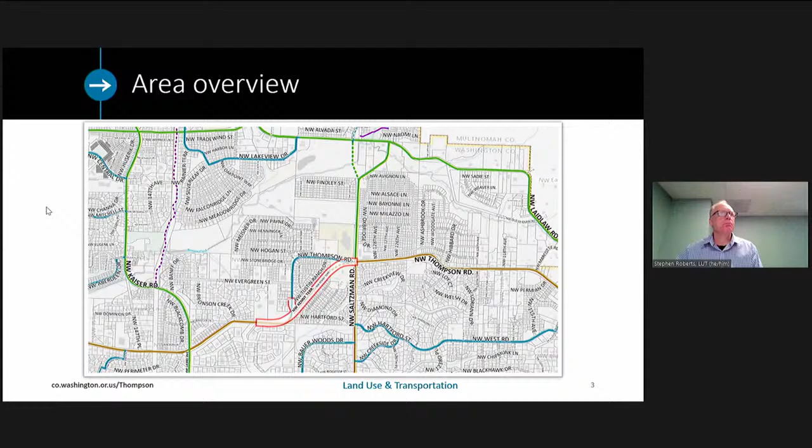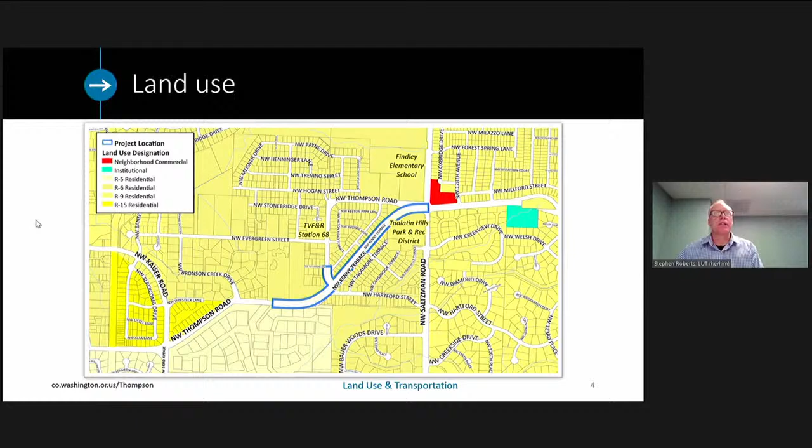Land use here is predominantly residential. There are a few specific uses in close proximity to this project site. We have Findley Elementary School, a large vacant parcel currently owned by Tualatin Hills Park and Rec District that'll be a future community park site, and a neighborhood retail and commercial center at the northeast corner of the intersection of Thompson Road and Saltzman. So we do have some pedestrian generators, or pedestrian attractions, in the area.

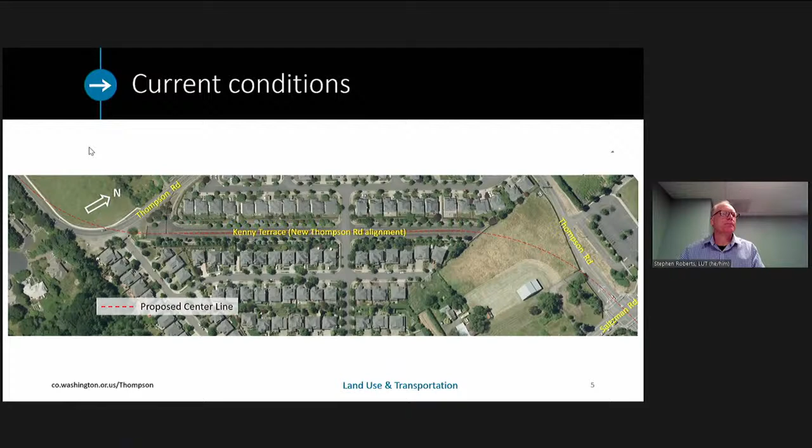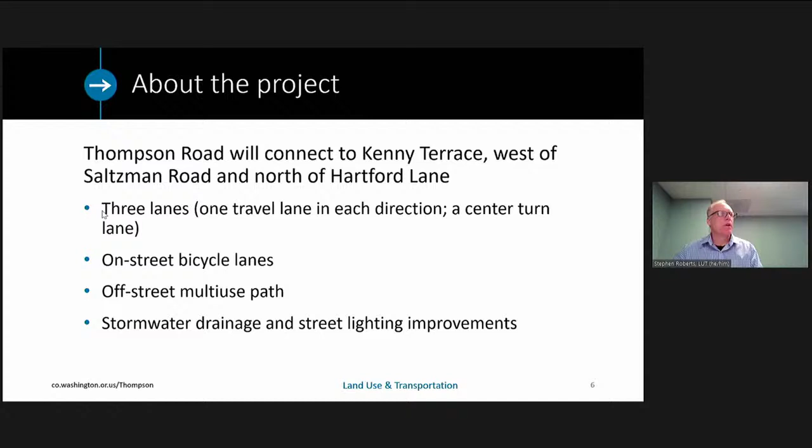The project will essentially look fairly similar to what you see there today in terms of the roadway. It will have 3 lanes: one travel lane in each direction for cars and a center turn lane. There are on-street bike lanes, and those will be modified to be what we call buffered bike lanes, so instead of a single stripe between the car lane and bike lane, there will be two stripes about 2 feet apart. That creates a little bit of visual and slightly larger physical separation between bikes and vehicles. There's an off-street multi-use path proposed as part of the project, and there would be additional stormwater drainage and lighting improvements as part of the project improvements through here.

I wanted to address, I'm sure many of you have watched or heard about a work session we held with our board back in February of this year. The purpose of that work session was for all county capital projects. The board has adopted a policy stating a preference to provide safer bicycle facilities on county capital projects. That might mean something called a cycle track or a multi-use path, but in most cases that typically would mean some sort of cycling option for people to ride outside the roadway, giving additional separation from vehicle traffic for people who are potentially less confident riders or have safety concerns—younger children, perhaps older adults—who may not be comfortable riding a bike on the roadway but would ride otherwise.

At the February 2nd work session, we took to the board a proposal for a multi-use path and compared that with existing conditions. A majority of our board members supported implementing the multi-use path option, for the reasons I stated: it provides a safer, more comfortable option for cyclists regardless of age or ability. Because we have pedestrian-attracting uses in the vicinity of the project, there could be increased pedestrian demand in the area over time, so we're supporting better access to those destinations for people walking and biking.

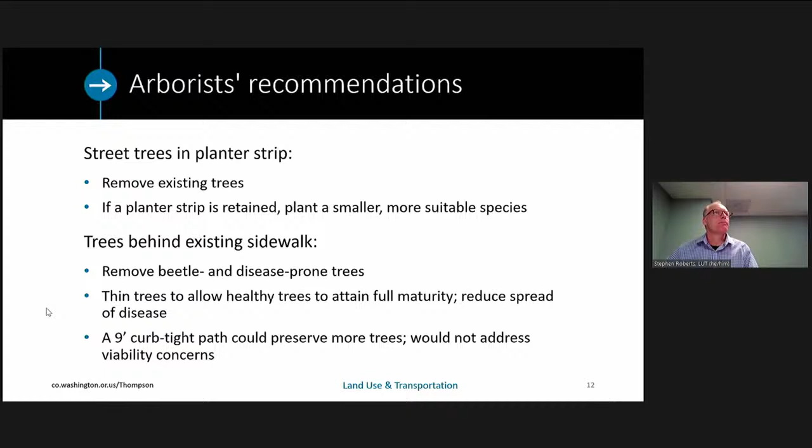So we're going to walk through some different designs. The first design we're calling the baseline design, and that's what the board expressed its preference for in the direction they indicated at the February work session. That is a 10-foot wide multi-use path.

The multi-use path means that it's a pathway off the street, designed for both bicyclists and walkers to use, pedestrians to use. With this design, there would be a 4-foot planter strip between the roadway and the sidewalk, matching what you would see on the ground today between the roadway and the existing sidewalk.

And then we looked at 2 different alternatives of a curb tight path - again, a pathway that would be off street, but would not have the planter strip and the trees helping to create more of a buffer between the path and the roadway.

So we have a few exhibits that I'll walk through that help illustrate what those different concepts would look like.

On the next several slides, the upper image reflects the existing conditions today. You'll see a 4-foot wide planter strip, that gap between the curb and the sidewalk, an existing 5-foot sidewalk, and then about 10 feet between the back of the sidewalk and the adjacent hedge and privacy fence, or in some places stone retaining walls. So there's about 10 feet of landscape area there.

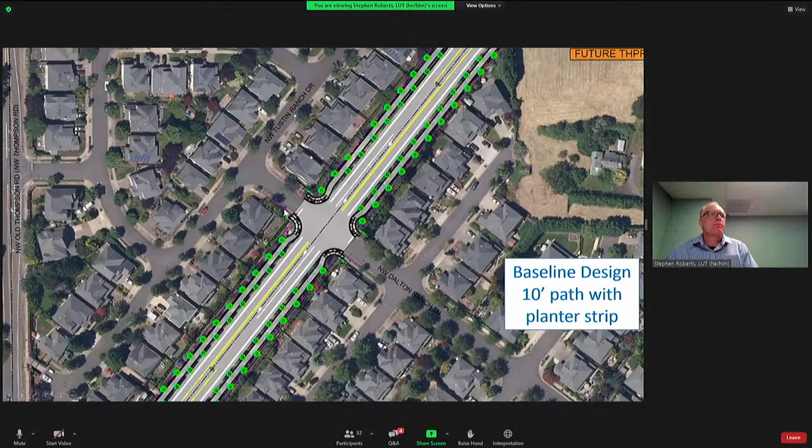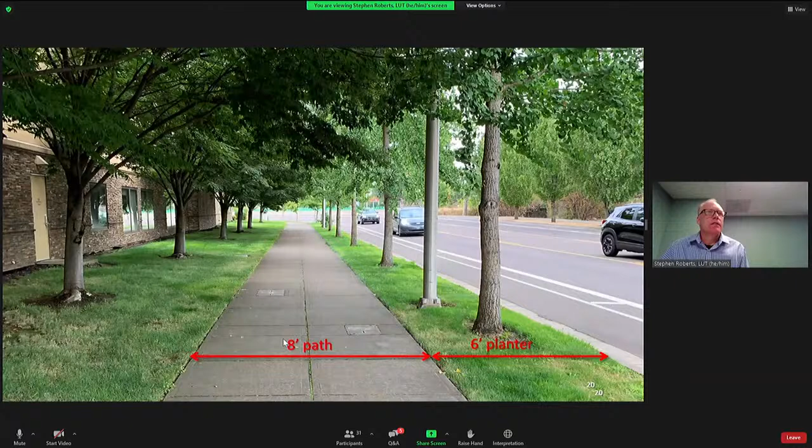This is a different configuration—an 8-foot wide path with a 6-foot wide planter. Again, not exactly what we're talking about here, but this slide helps illustrate the effect of trees planted on both sides of the path. If you look closely, the trees are staggered so that those behind the sidewalk fill the gaps between the trees near the street. Over time, as they mature, they create a nice uniform canopy that provides a lot of shade over the pathway. These trees were planted about 10 years ago, so this shows the effect after roughly that same period of time.

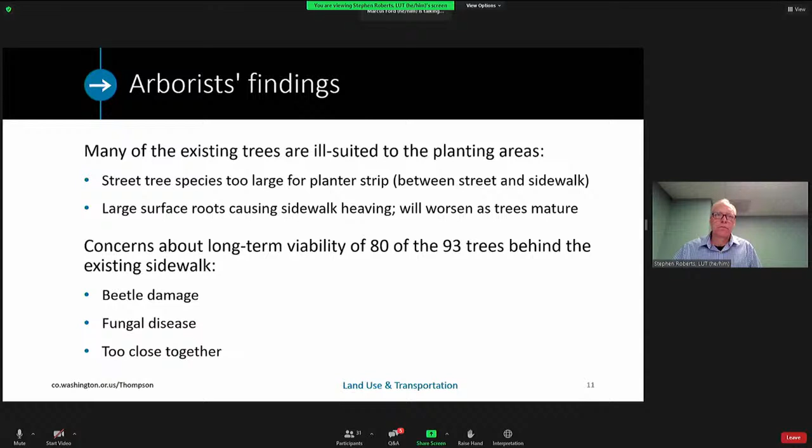Thank you. Another question, asked by Eric. This is a road alignment project. Why so much emphasis on sidewalk and trees when nearly 100% of the residents in the area oppose? What is the budget without the additional wider sidewalk? I believe it was 500,000 less. Interesting, that was not shown.

There are some other options too, things called cycle tracks that are sort of like this, but they're actually more adjacent to the roadway for a cyclist to ride on, though elevated up slightly above the roadway.

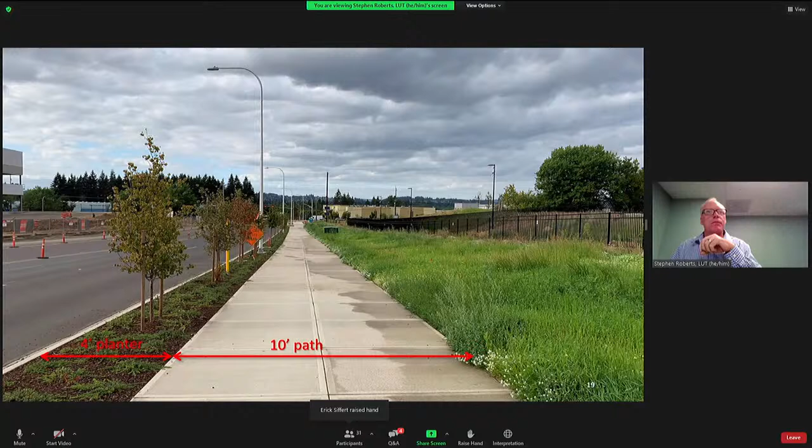Even though the crux of the project from a vehicular standpoint is really just connecting up either end of that existing roadway, we are also trying to think about how we create a more interconnected pedestrian and bicycle system that's more accessible, safe, and user-friendly for people of all ages and abilities. In this particular context, there are pedestrian destinations of the school, the neighborhood commercial center, and a future park there. So we think that with this road project, there's an opportunity to lay a foundation for what could be a more broad, interconnected network of these kinds of facilities.

But perhaps even if it weren't part of a future interconnected system, we could still anticipate there's going to be an increase in pedestrian traffic in this area as the park site develops.

I've walked this area on Kenny Terrace a few times myself just to get familiar with it, and observed quite a few people out walking at different times. I actually walked further west on Thompson Road on some new sidewalks the county built within the last few years that are 5 and 6 feet wide. I was walking with another person, and we kept having to step aside and walk single file because we kept getting passed by people walking the other direction or jogging. This was at 10 in the morning on a weekday. So there is a real, if you build it, they will come scenario that happens.

We find this all over the county: when we either build a sidewalk where there wasn't one previously, or when we upgrade our sidewalk facilities, they do just attract more usage.

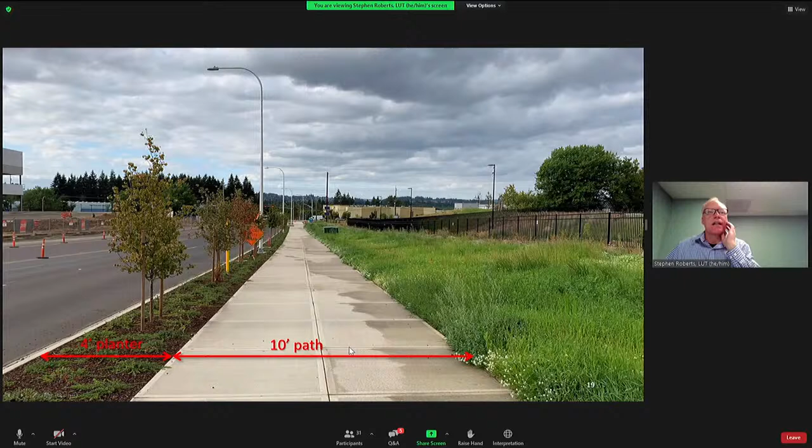Right, and as you were answering, Eric's hand came up, so I'm assuming it's in reference to what you were just talking about. So I'm going to go ahead and allow Eric to speak. Eric, you can unmute yourself and ask a follow-up.

Yes, thank you. Hi. While I'm a resident of the neighborhood, Tallamore Terrace, I'm not on the HOA board, but I've been involved in a lot of the meetings. Thank you all for doing the project. I think the ideas are pretty good.

We had a chance, not by choice, someone forwarded to us about the February meeting, and a lot of us listened to it. And since then, petitions have gone around, and nearly 100% of the people that actually live here do not want this to happen in terms of the sidewalk part of the project. I'm just interested to know if this was such an important thing that Chairman Harrington brought up 3/4 of the way through the February meeting on a 3-2 vote.

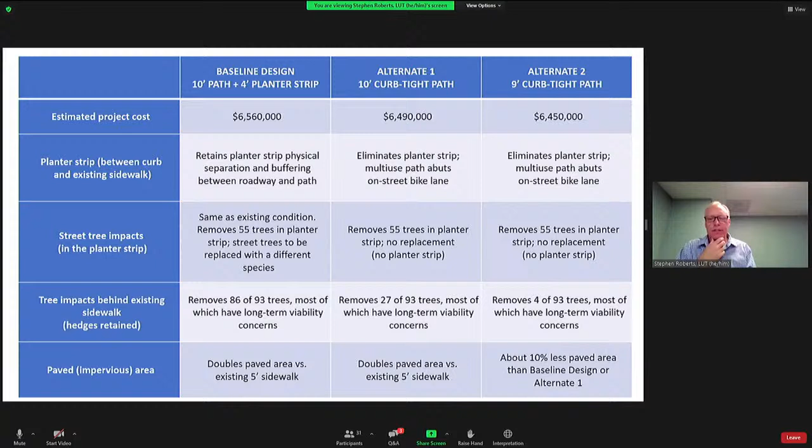I think your points are all well taken, and as we move forward, we certainly are going to continue engaging with the neighborhood and the homeowners association. One of our next steps with the project—maybe Rocky can help us out. I know we are talking about doing another open house for the project, and I'm drawing a blank right now on the timing of that.

Hey Stephen, so we're waiting to see what the results are from this meeting, and we're looking at possibly November for the second open house. All right, great, thank you Rocky.

All right, we have another question in the Q&A from Kayati Shah, and my apologies if I mispronounced that. Is the county considering providing a retaining wall to impacted houses like Bethany Boulevard houses have?

Oh, okay, I suspect that might have been a sound wall, probably. I think I will probably ask Joe, do you mind?

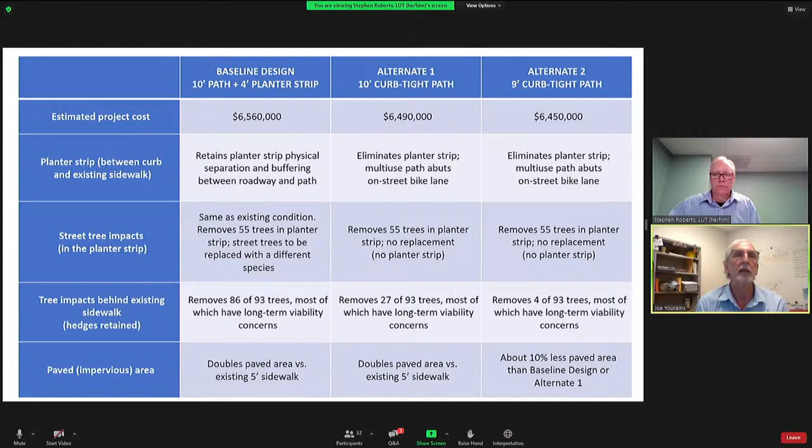Yep, no problem, Stephen. At this time, we did not do a sound wall analysis, and based on when the homes were built relative to what the road was determined to be, we wouldn't look at noise mitigation on this section of road. We're really not expanding the road any more than what it is. We're not adding a lane, we're just making that final connection from what it was before. We haven't changed what the road is itself, whether collector to arterial or adding it from a 3-lane to a 5-lane. So we wouldn't look at sound mitigation.

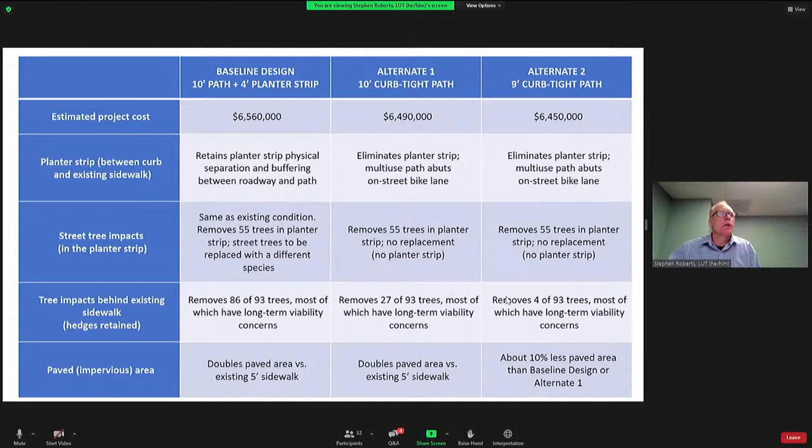Forgot to leave that last slide up. Was that it for that question? I apologize, Stephen, yes, I think so.

To sum up what Joe was saying, the county policy for a project like this does not require doing noise analysis or providing a noise wall. We're working within that existing right of way. The developer at the time had the opportunity, capability, and encouragement to construct some noise separation, so what was built in this location was a combination of fences and an evergreen hedge that helps provide visual buffering between the homes and the roadway.

Thank you. Another question from the Q&A from Jim. Jim asks, I see the curb tight path is analyzed in both 10-foot and 9-foot widths. Can the baseline scenario be modified to a 9-foot path in order to reduce the paved area?

I think that's something that could be evaluated, but the preference for 10 feet is that if we're trying to create a true multi-use path where we want the ability for people to cycle and walk comfortably, potentially side by side, then we're looking to create a 5-foot bike lane, which is our minimum bike lane width, and a 5-foot sidewalk, our minimum sidewalk width. Put those two together and you've got a 10-foot wide pathway. So 10 is typically what we would want to strive for in a situation like this — that would be considered the ideal scenario.

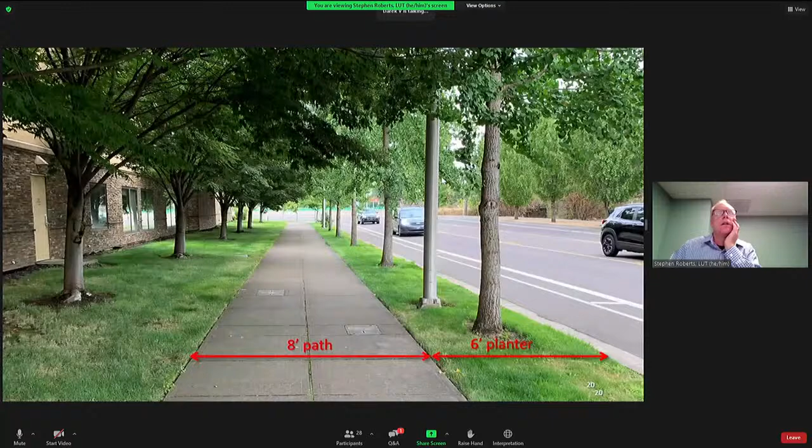All right, perfect. Yeah, if you look at the park on the east side at Saltzman, the neighborhood has a sidewalk that currently ends at Saltzman, and there's no way to get from the neighborhood up on Saltzman to the park. So we're talking about a really wide sidewalk that, of course, the community is totally against, but we really need a sidewalk on the east side of that park property to enable another path from the neighborhood into Finley.

That is correct, Stephen. We had looked at working with the park district on matching the sidewalk we put up along the north side, along with the east side of their property. That would be a 10-foot multi-use path along Saltzman. That takes us all the way down.

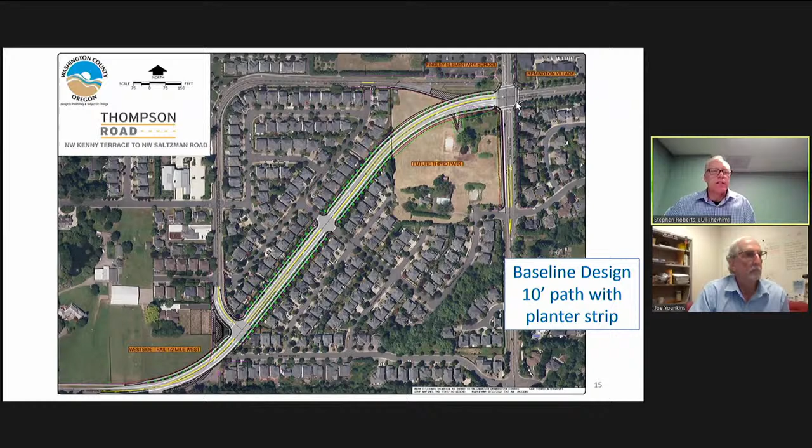And are you thinking mostly about car access, Derek? Yes. Okay, I'll start and let the project experts jump in if I get too far afield. So my understanding is that because of the proximity of the Saltzman Road intersection...

There's also a wetland area, I believe, right up in this area. So between these two fixed objects, if you will, there's a fairly narrow opportunity to try to place a driveway here. Our concern is that putting a driveway here is really just too close to the Saltzman intersection to be safe. So what we're actually going to be proposing is signage that will direct people looking to access Findley Elementary School to continue west on Thompson Road down to the Old Thompson Road connection, and then use Old Thompson Road to get up to the school site and back out.

And you're right, there's a proposal to restrict vehicular access here. We would retain bike and pedestrian access through this roadway, but close off the vehicular access to minimize opportunities for people coming from and going to the school to drive through the subdivision.